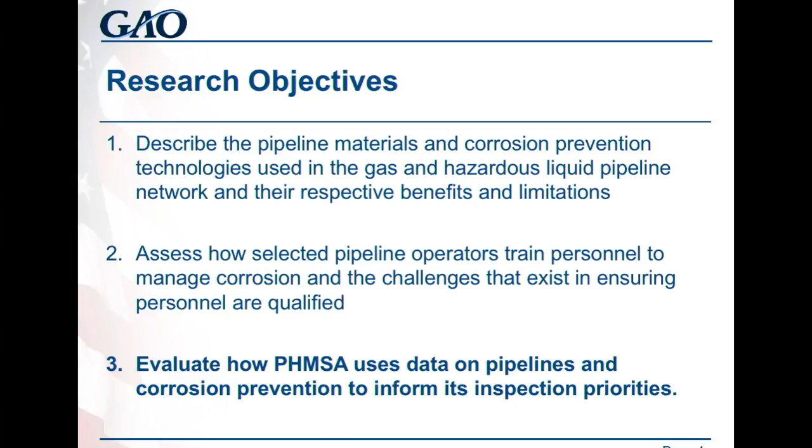Real quickly on the methodology, what we did was we assessed the data that PHMSA has available to itself when it is determining its inspection priorities, and that includes the inspection data that it collects through integrated inspections, as well as the enforcement data, as well as operator reported data through annual reports. And we evaluated how PHMSA uses this data through its risk ranking index model, which we'll explain in more detail in a second.

We conducted a number of interviews with PHMSA personnel, both at headquarters and across the country, who are involved in these inspections. And we compared PHMSA's approach with federal standards for internal control put out by the GAO, as well as OMB guidance on risk analyses, as well as with PHMSA's own strategic plan.

So real high level, this information won't be new to folks in this room, but as you know, we have a wide-ranging pipeline network in the United States that includes gathering, transmission, and distribution pipelines. The focus of our work in this presentation is on the transmission pipelines, and even a small segment of those pipelines, which are the interstate pipelines that we looked at. And those are the pipelines that are directly inspected by PHMSA.

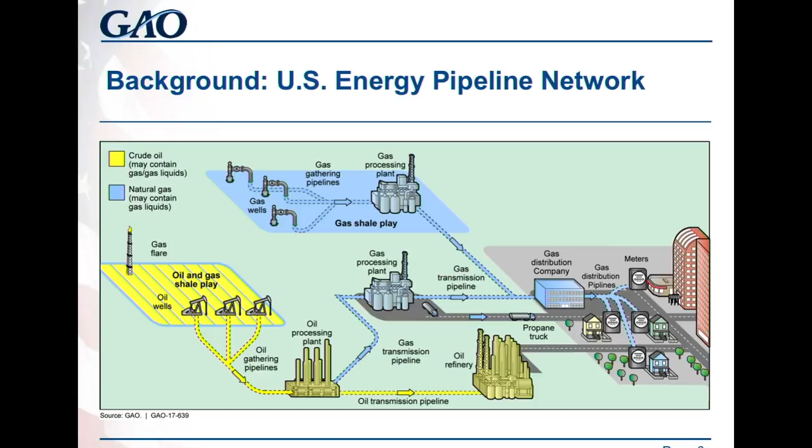Those pipelines are, of course, also under the integrity management programs, and the pipeline operators maintain their own systems and perform their own safety evaluations. But we were looking at PHMSA's approach to doing their own inspections of interstate pipelines.

Just a couple things to note about PHMSA's role in terms of oversight. The states also have a great role in terms of managing and overseeing intrastate pipelines. PHMSA's role is on conducting what they are known as integrated inspections.

And these are primarily desk reviews, but they also include going out and walking the lines with pipeline operators and identifying areas of concern that operators may have identified with regard to how their cathodic protection is operating, or evaluating areas that operators may have reported to PHMSA in terms of challenges with either bare pipe or perhaps ineffective coating.

And PHMSA uses its inspection staff, approximately 200 or so individuals across the United States, to perform these as well as other activities, and Ken can probably talk more about that, about how that staff works.

Real high level, I think the other speakers on this panel will talk about internal corrosion. But between 2010 and 2015, corrosion-related significant incidents accounted for about 22% of all significant incidents that were reported by operators. Within that corrosion, there is, of course, external corrosion events, and there's also internal corrosion events. And the prevalence of those specific types of events can vary across the pipeline network, and I think the operators here can talk about where internal corrosion is most prevalent and what they do to address it.

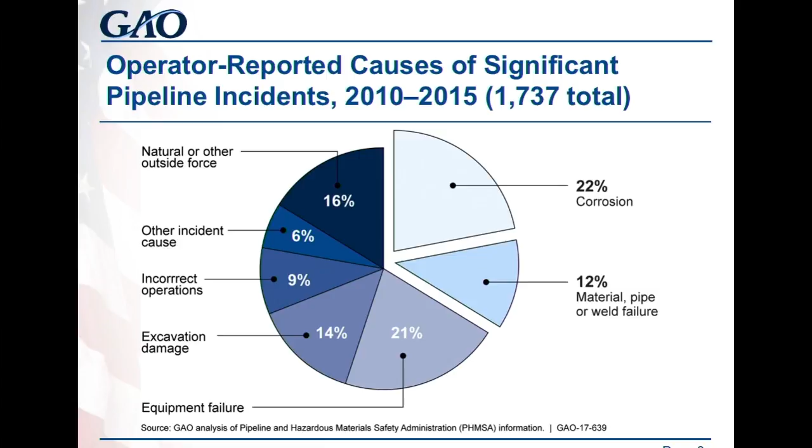So in terms of findings from our report, what we've found generally is that, yes, indeed, PHMSA does make use of data to target and prioritize its integrated inspections of interstate pipelines. However, there are some areas in which it could improve its process, particularly around how it documents the decisions it makes for which pipeline segments to target for its inspections, as well as ensuring that the process it is employing is effective towards identifying those pipelines that are of highest risk and in most need of inspection.

To do this, to prioritize these inspections, it uses what PHMSA calls its risk ranking index model. And what it does, it captures all of the risks within an individual pipeline segment and tries to quantify that risk and then assign either a high, a medium, or low score to that pipeline segment.

And based on that score, pipelines are either inspected by PHMSA on a 3-year basis if they are considered high risk, and a 7-year basis if they're low risk. Medium risk pipelines are to be inspected every 5 years by PHMSA.

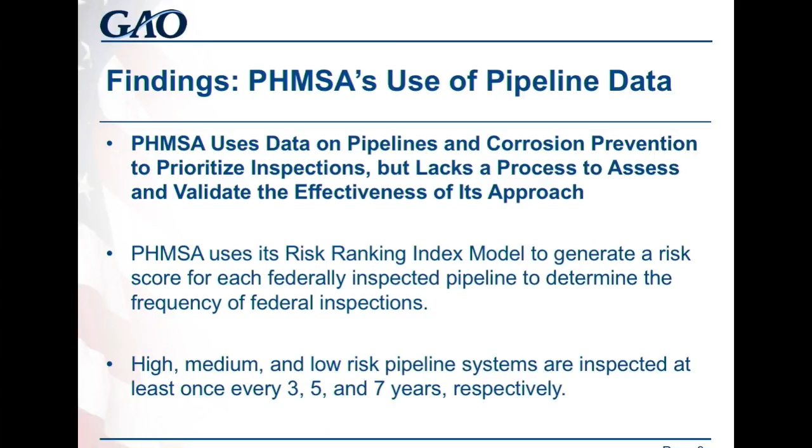And just to give you a sense for how this model works, basically PHMSA looks at the characteristics of an individual pipeline segment and quantifies those characteristics according to various threats that it considers to be indicative of potential incidents. So for example, one of the primary characteristics is unit miles, and that's basically the length of the pipeline segment that they're inspecting. And generally, under the risk ranking index model, the longer the pipeline segment, the greater the relative risk there is, because the longer the pipeline segment, you would have more opportunity for a potential event.

Other threat factors include bare pipe mileage, and whether there is ineffective coating that's been reported by the operators. For example, if an operator identifies that coating has perhaps been disbonded along one of those pipeline segments somewhere, they're having to apply additional cathodic protection, they can report that to PHMSA, and that will go into the model, and PHMSA will use it to evaluate the severity of the potential risk.

Other events include significant incidents, and there are other events that we also include in the report that you can look at. It also included low frequency ERW pipeline miles and other factors as well.

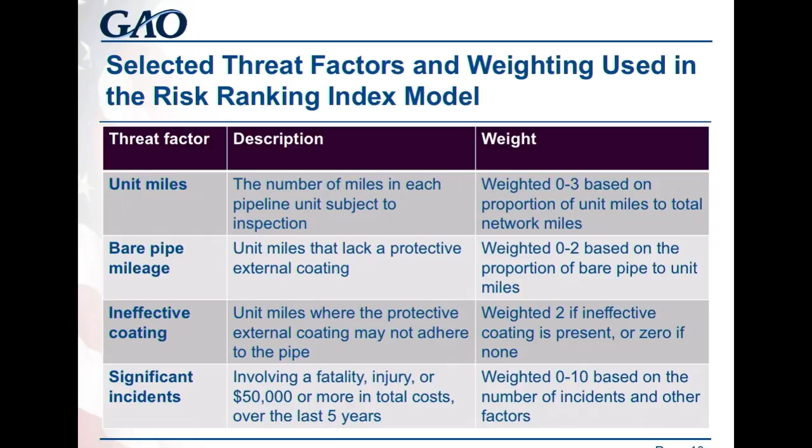It takes all of these threats and PHMSA assigns a weight to each of these threats, adds up the total weight. That weight results in a potential score, and that score is multiplied against a consequence. It basically looks at the pipeline diameter, how much commodity could be sent through the pipe, also the type of commodity, as well as whether it's in a high consequence area, and it results in a score that PHMSA uses to assign either high, medium, or low risk.

So what we found was that while PHMSA is making use of the data that it has available, it doesn't have all the data it would like to make more targeted assessments of risk. We found that PHMSA has not fully documented the rationale behind some of the key assumptions within the model. That becomes a challenge when PHMSA goes back to look at how effective the model is, and whether the assumptions it's made about pipeline risk are still accurate, and whether PHMSA is targeting its inspection forces towards those risks as they currently are.

Among the areas of concern we identified was whether PHMSA had used data to determine the specific weights for individual pipeline threats, as well as the thresholds for risk tiers. Each pipeline segment is given a score, and PHMSA has determined that anything over 30 is considered high risk, anything below 5 is low risk, and anything in between is medium risk. We would expect to see documentation for why 30 is in particular a high-risk threshold and why 5 is a low-risk threshold, and how those judgments were made.

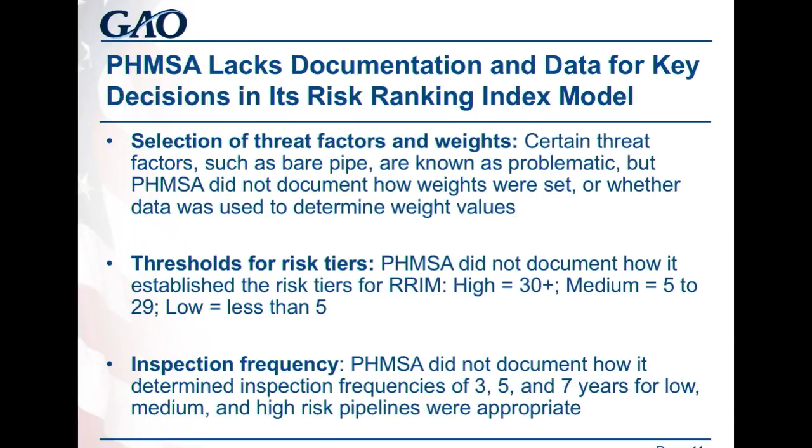The same thing with inspection frequency. Federal internal control standards, as well as OMB standards, require that any judgments put inside a model used for assessing risk by the federal government be clearly stated and based on available data, and that PHMSA use that data to make those assumptions so they can be further evaluated in the future.

So just to explain how the model works: as a result of the threats and weight factors, in 2016's run of the model, basically 70% of all pipeline mileage that PHMSA inspects is considered high risk and is subject to PHMSA integrated inspections every 3 years. 1% of all pipeline miles that PHMSA inspects are considered low risk and are subject to inspection every 7 years.

From our perspective, that balance may be correct—that's up to PHMSA in terms of how it wants to allocate its resources—but we would expect there to be documentation in place for the rationale behind how this model works. Considering that PHMSA has limited resources to conduct those inspections, approximately 200 personnel across the country, making sure it's applying those resources to address the highest risk pipelines is important to ensuring the safety of the system.

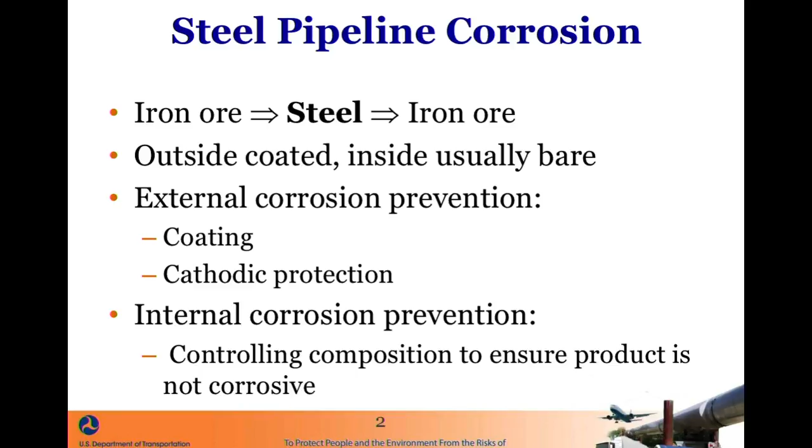The main method to control corrosion on the inside is to control the composition of the natural gas, keeping it dry, or if it's a liquid line, keeping water and other impurities out of that line. So in general, oil and gas is not corrosive to steel - it's just the impurities which are.

Here's a list of some of the impurities. We try to keep out water, carbon dioxide, chlorides like what may be found in salt, and hydrogen sulfide. Some of you may have heard the term sour gas - hydrogen sulfide results from organic decomposition, like the rotten egg smell, and we try to keep that out.

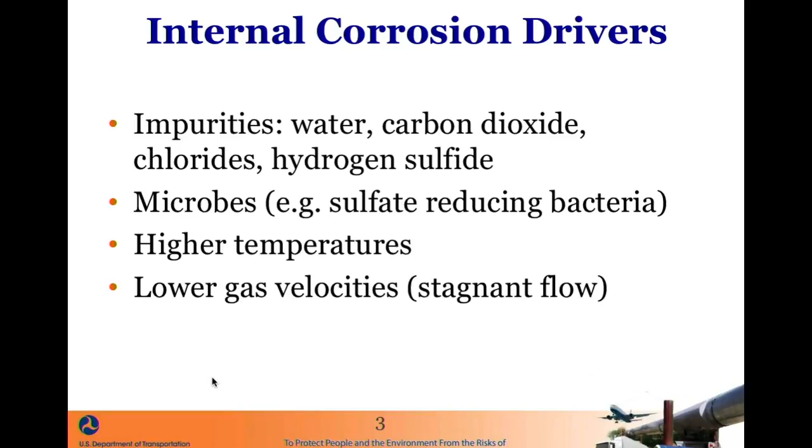Other things that may occur is if water is present inside the pipeline, bacteria or microbes may grow, and essentially they poop acid, which will dissolve the steel. That can occur on liquid lines. There's also a rule of thumb regarding temperature: every increase of 10 degrees Celsius will double the corrosion rate, so that will affect corrosion.

Most pipelines flow at more than 10 miles per hour, and that keeps the product flowing - it will sweep away any water or impurities in there. If you have slow-moving velocity streams, you could get stagnant flow. If the water sits in one spot for a while, it could localize the corrosion in that one area.

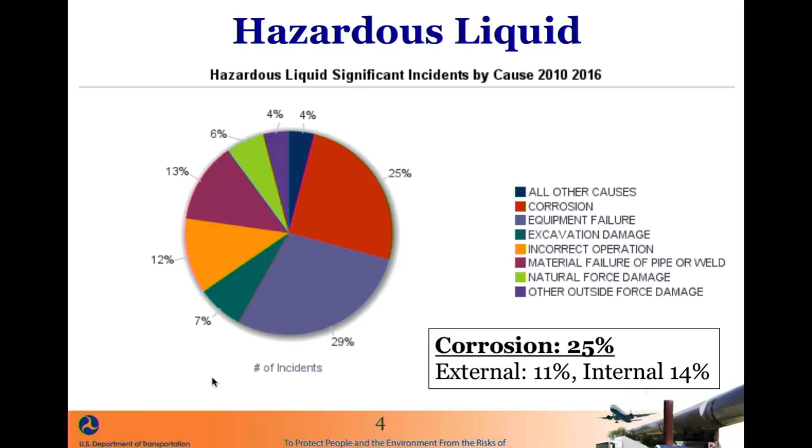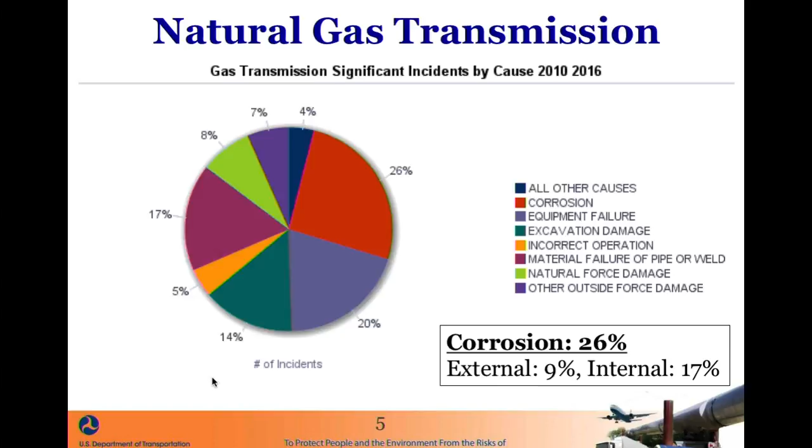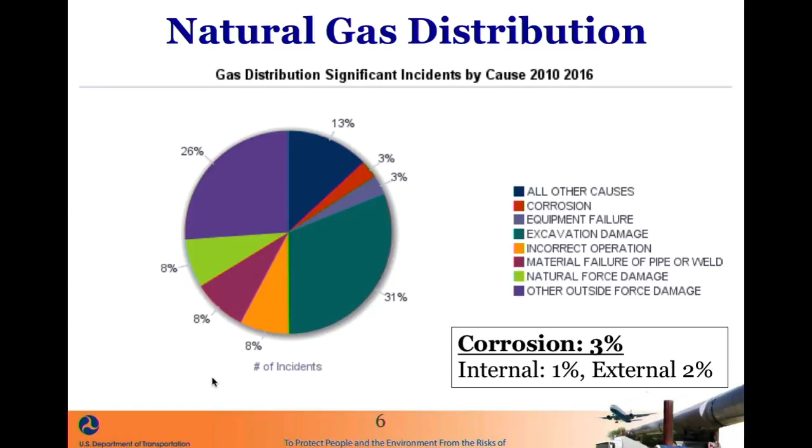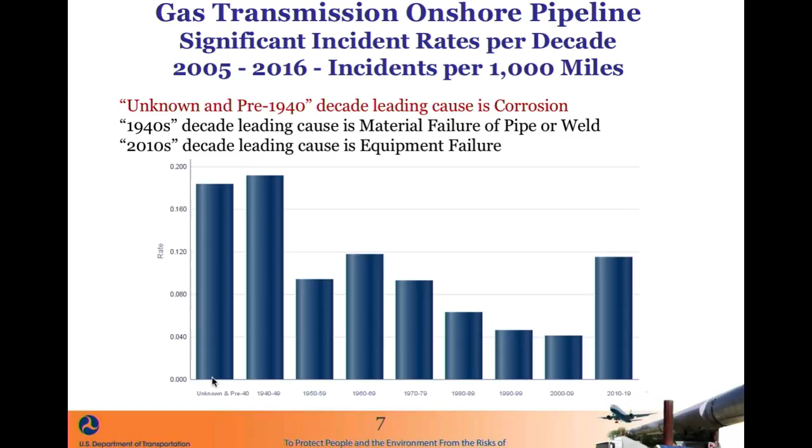So I want to highlight some of the significant internal corrosion incidents. The real game changer in the industry was the 2000 Carlsbad, New Mexico incident, where 12 people died camping next to a gas transmission pipeline in a Class 1 location, essentially in the middle of nowhere. But they were right next to a segment of the line which collected a lot of liquids, and that caused internal corrosion of this line, which was not subject to inline inspection. We passed new regulations since then, which I will focus on, to help prevent an incident like that from occurring again.

And this is a partial list of some of the other incidents here involving liquid lines. As you see, most of the significant incidents are smaller releases.

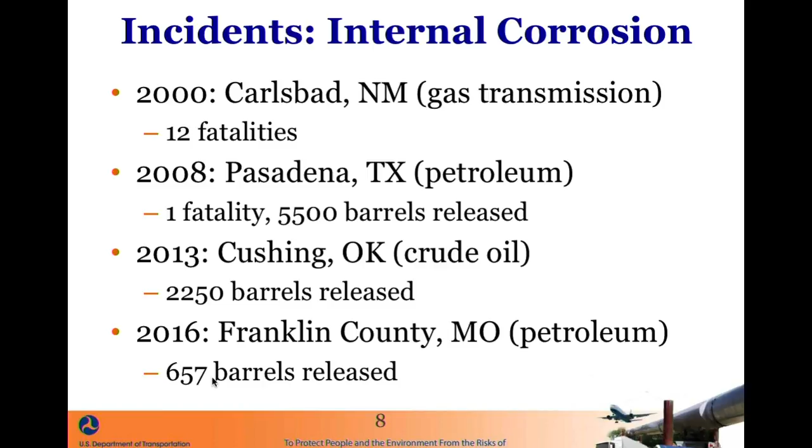So the main way that we control internal corrosion is by making sure that the product inside the pipe is not corrosive, and we do that by controlling the impurities in the pipe. There's a lot of monitoring which takes place, and for natural gas, the FERC tariff requires 7 pounds of water maximum per million cubic feet of natural gas, and a lot of times the customer has specifications for the amount of quality and impurities that are allowed in the product.

Another way is to minimize stagnant flow in a line. If the product's always flowing, corrosion will not localize in one place if the corrosion products are constantly moving. For natural gas lines, it's important to remove the water because without water, natural gas line corrosion really does not occur. There's also frequent monitoring and inspections which take place, and that's a very important part, because if you don't look for it, you won't find what you're not looking for.

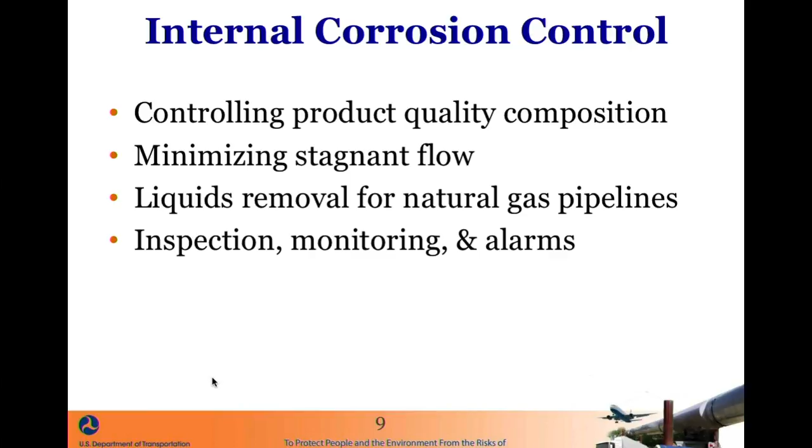So coupons are placed in the pipeline. There's monitoring equipment to test for the amount of water, CO2, H2S, and there can be alarms that go off in the control room if they exceed certain levels.

To remove water, cleaning pigs are often run to push water out of the system. Inhibitors are added to slow down corrosion rates, especially in liquid lines. Biocides are added to stop the microbes from growing - these are like antibiotics to keep the bacteria level down. And there could be other chemical additives as well.

Inline inspection tools are one of the best tools to use to detect internal corrosion. You'll see that throughout the pipeline safety regulations, running ILI tools as a part of effective integrity management to control corrosion rates.

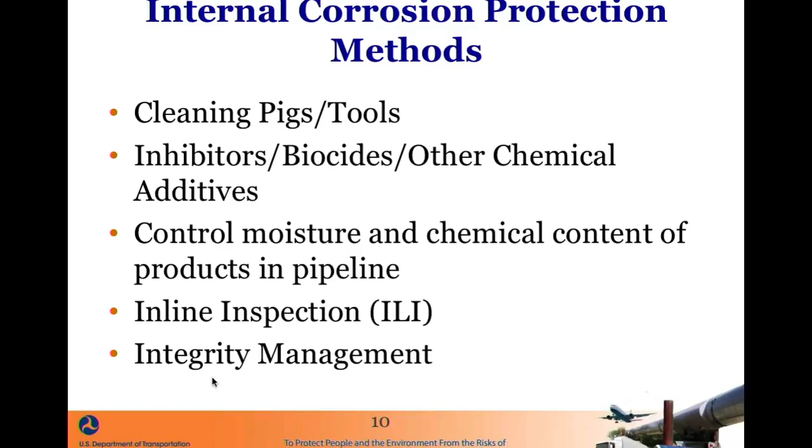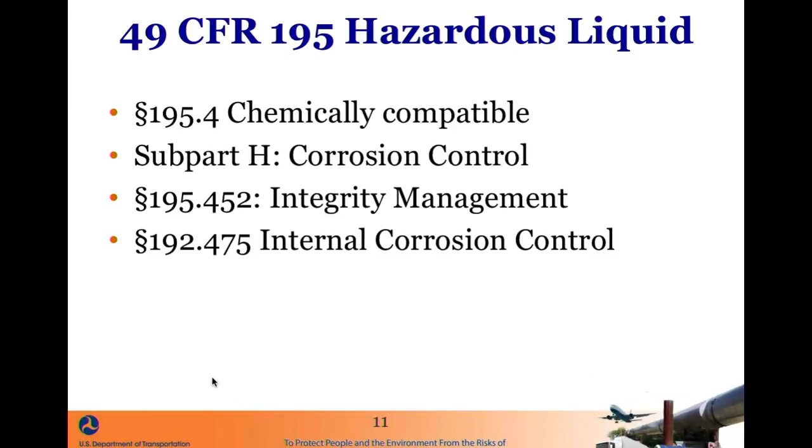So corrosion is mentioned throughout the federal code. These are some of the Part 195 code sections that apply to hazardous liquid pipelines. It says the product inside the pipe must be chemically compatible with the steel pipeline. There's an entire subpart on corrosion control, and integrity management focuses highly on corrosion there. And similarly, in the gas code, in the Part 192 code for natural gas pipelines, there's similar sections in there.

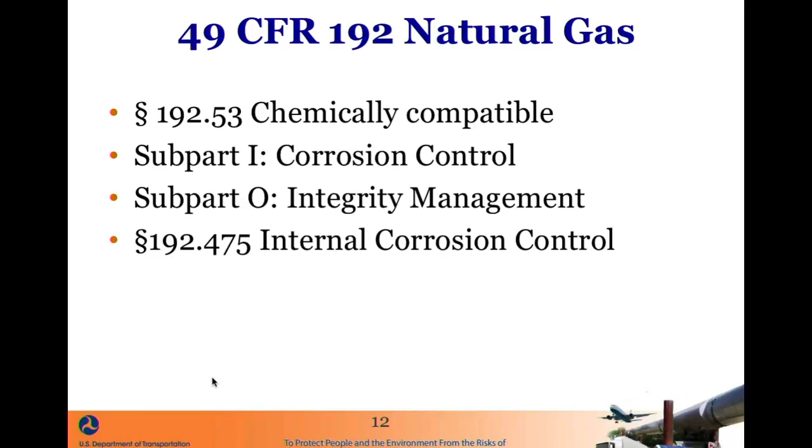I'll talk about 192.475 in the next slide. In the natural gas code, it says corrosive gas may not be transported by pipeline - it's pretty clear, prescriptive on that. And it says whenever a pipe is removed from the system, the internal surface must be inspected for evidence of corrosion. So whenever you're doing pipe replacement, that's something that you need to be looking for.

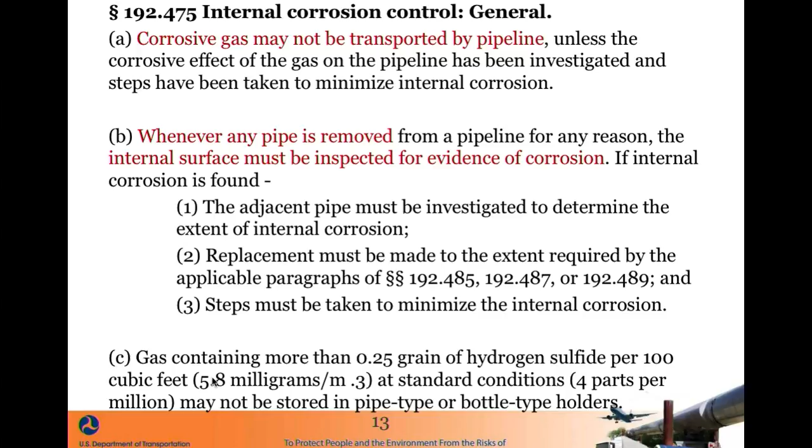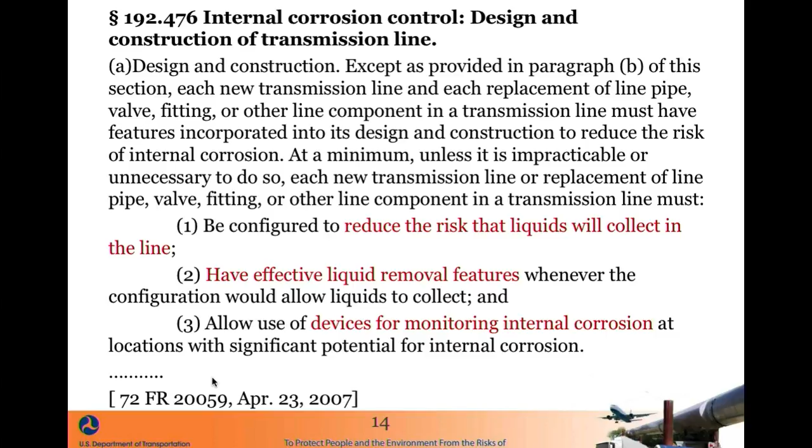So PHMSA, we have many tools. Many of you know about our regulations. We also have about 150 pipeline inspectors, and I think more than 300 partner state inspectors that are out there inspecting pipelines nationwide. We also take enforcement action with corrective action orders, fines, penalties. But one of the nicest, most effective tools I think is the research side. We have a $12 million a year research budget to try to improve pipeline safety. It's more of the carrot approach rather than the stick - we try to shoot for improving best practice, improving the technologies versus the punishment side.

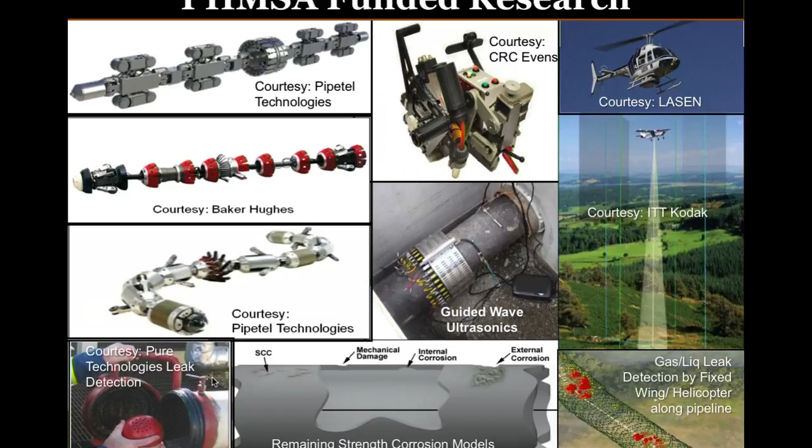Specifically related to internal corrosion, these are some of the projects we have. The first is advancing the technologies used in inline inspection tools to improve the probability of detection and accuracy, to find smaller defects.

The second is that we have models widely used in industry, including RSTRENG, and we have research to improve these models to provide better calculations on how much life you have left in the line, so we could effectively manage it before it fails.

The third one is interesting - it refers to MIC, or bacterial microbe growth, and it uses essentially an antibiotic cocktail. Instead of using one antibiotic, it's a mixture of several to prevent microbes from growing inside of that line.

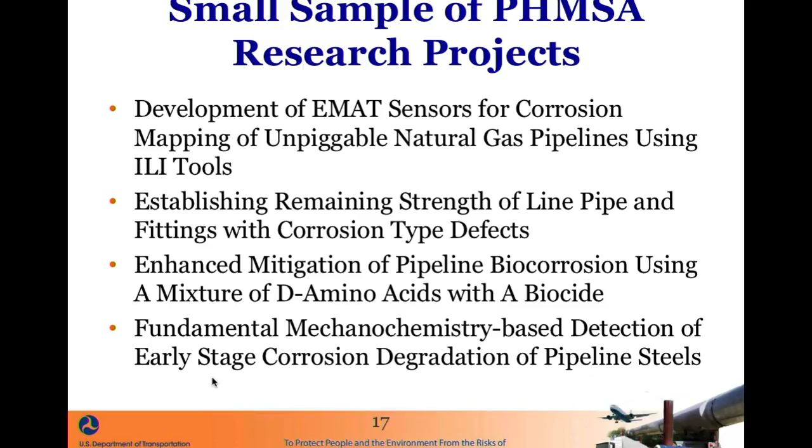The last one is to provide earlier detection of corrosion rates. That gives us a very quick summary. Internal corrosion remains a focus of PHMSA. We're very concerned about it, and we have efforts on all fronts to address this - the regulatory side, inspection and enforcement side, and the side that falls under me, the engineering and research side, where we work with service providers and standards to try to improve it. Thank you.

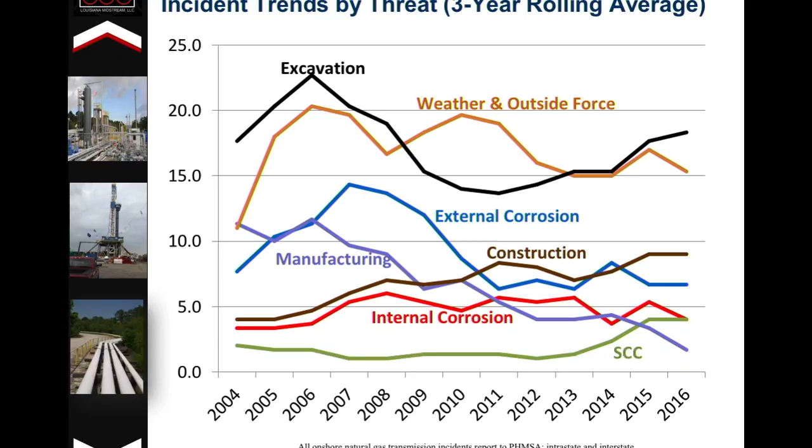I want to talk to you today strictly about internal corrosion. I'm going to skip a couple of these charts and show you an interesting trend in the last few years. You see that internal corrosion is actually lower in terms of number of incidents than external corrosion.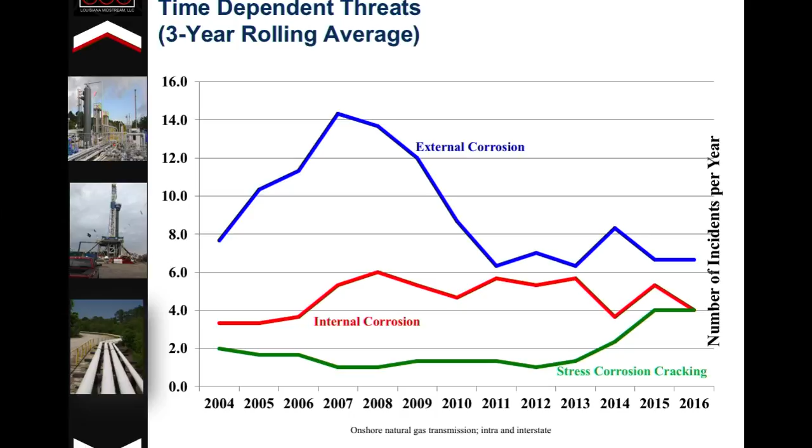Stress corrosion cracking - who's heard of that? Okay, so that's some kind of bad stuff, right? We track all that information, and obviously we send it to PHMSA. This comes from PHMSA. So we're going to talk about internal corrosion specifically, which is not the highest number of related failures reported, but it's a very significant event.

We don't have to cut it to see it - we can x-ray it, kind of like you x-ray your tooth. That's what we normally do when we dig a location and want to see if it has internal corrosion. We x-ray it, because if you use your ultrasonic thickness probe and happen to put it here on the outside, you're not going to see anything, it's not going to measure anything. So it just depends where you put your probe - you might get lucky and see a wall loss, or you might not. So we x-ray it so we know where it's going.

Now, internal corrosion is caused by water in the pipeline. That's it - if you have no water, you have no corrosion. So the question is, well, duh, get the water out. Well, that's what we try to do every day, every hour, every minute. Now, there's a lot of stuff once it's mixed with the water that causes us problems - salts, glycol, bacteria. Yeah, bacteria lives in our pipelines, and they are nasty little critters, and they poop often.

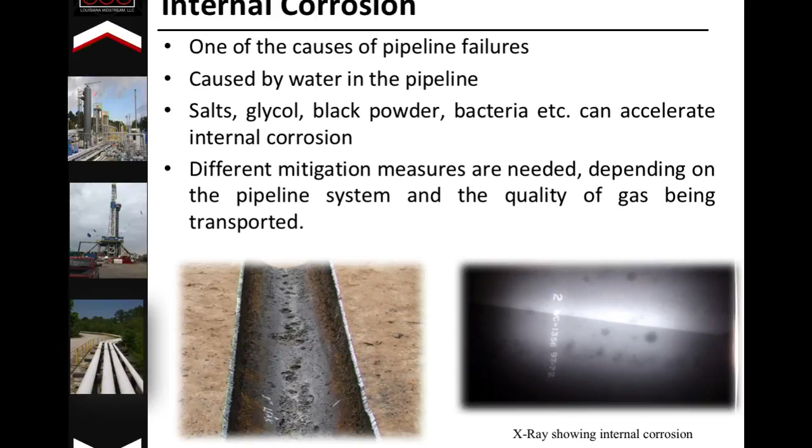So we try to... Now, how do we control it? We have many different ways of controlling internal corrosion. After Carlsbad, I did a lot of work for El Paso during that time, and we really got a lot more engaged and serious about trying to apply every tool in the toolbox to get rid of internal corrosion. So how do we do that?

There are piggable pipelines and non-piggable pipelines in this country. For a piggable pipeline, it's really fairly simple. You clean it, you pig it, you inspect it, you find this stuff, and if it needs to be fixed, you fix it. Sounds pretty logical. But the problem we have is we don't have all of our pipelines piggable, so we have to deal with non-piggable pipelines.

So how do we go about not allowing internal corrosion? The first thing you've got to do is try to make sure that there's no water in the pipe. So you monitor gas quality. We have gas chromatographs everywhere, right? So we try to make sure that no water enters the pipeline. I would rather do that than have the pipeline full of water and then have to deal with it. Does that make sense? So we try to get the water out, we monitor and we sample.

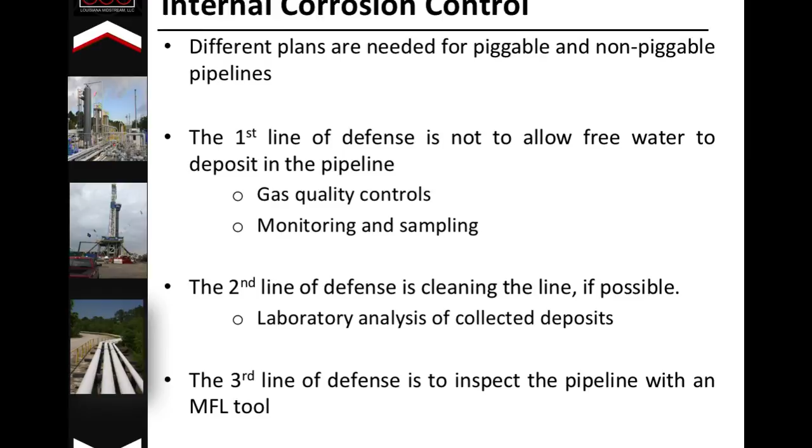Who's heard of coupons? And these are not the stuff you redeem at Walmart. Okay, we'll show you a picture of those.

The second line of defense is clean the line. Now, in our company, every time we clean a pipeline, we sample what comes out. That's automatic. We take a sample of the water or the fluid, we send it to a lab, the lab runs the analysis and tells us what's in that cocktail mixture. So that information is very important because that tells me if I need to increase the frequency of my cleaning or not. So if I run a pig and I get nothing, why do I need to run it next month?

I can probably delay it a few months. Now, if I run a tool, or if I run a cleaning pig and I see a lot of bacteria, then I have to do something else. So sampling, monitoring, and detection is a very critical part of internal corrosion defense.

And then our best tool really is an MFL tool, magnetic flux leakage, our smart pig. There's a reason why they call it a smart pig, because there are dumb pigs too. I'm going to show you a picture of those.

Okay, so gas quality, we just have to enforce our tariffs. We know we're not supposed to have more than 7 pounds of water, so we just have to enforce it. If somebody gives you more than 7 pounds of water, then you have to either shut them in or make a quick phone call and say, hey, what's up, what's happening? Carbon dioxide is a very critical part, and we have a tariff for that.

Hydrogen sulfide, we have a tariff for that too. So we do not want to allow more than 7 pounds of water. We have online analyzers, and we do have automatic shut-in valves.

Now, a producer can get really ugly if your shut-in valve is 30 minutes. So they want it to be 30 years. So we start our negotiation between 30 minutes and 30 years, and we end up probably at about an hour. So we have to give the producer time to make sure his glycol tank is full, to make sure his treatment system is working, but we need to be prepared to shut him in so we don't allow a lot of water in the pipe.

Now, how do we monitor? Coupons, weight loss coupons. These are the guys at the bottom left. Basically, it's a piece of steel of a very, very specific weight. We measure it down to the thousandths of a gram, and it has a code on it, a number. We insert it into the pipeline at a very specific location. We have to know where that is. And then we come back every 6 months, we pull it out, and we measure and weigh it again. If it loses weight, this means there's corrosion, and we can calculate that with a simple calculation. And if it doesn't lose weight, then there is no internal corrosion happening during that 6 month period.

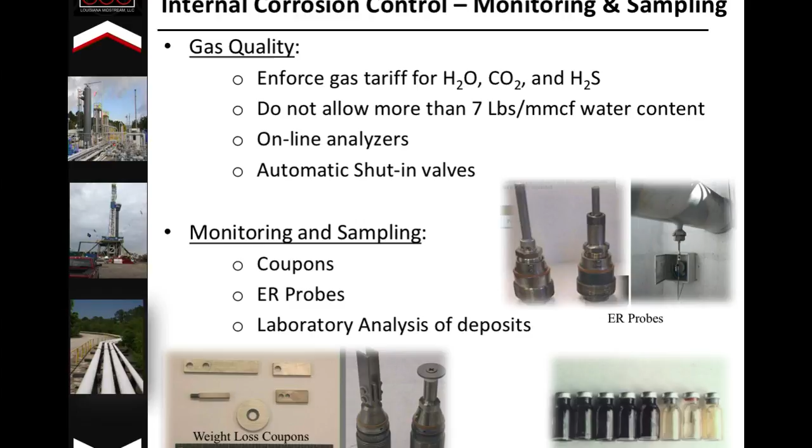So we collect the deposits. We adjust the cleaning frequency based on the results. We do chemically treat certain pipelines. I'll show you a picture of an injection pump. And biocide to kill bacteria. Now, the biocides, we have many different kinds. My favorite is formaldehyde. It works when I'm dead, and it works in the pipeline. That is my favorite biocide.

Inline inspection, obviously. And inline inspection is really interesting because when you run that tool and you get that data, if you see a very specific area of a high concentration of internal corrosion, then you have to start asking yourself a question. And a lot of times, it is just downstream from a producer. Ding, ding. So that information is very, very important.

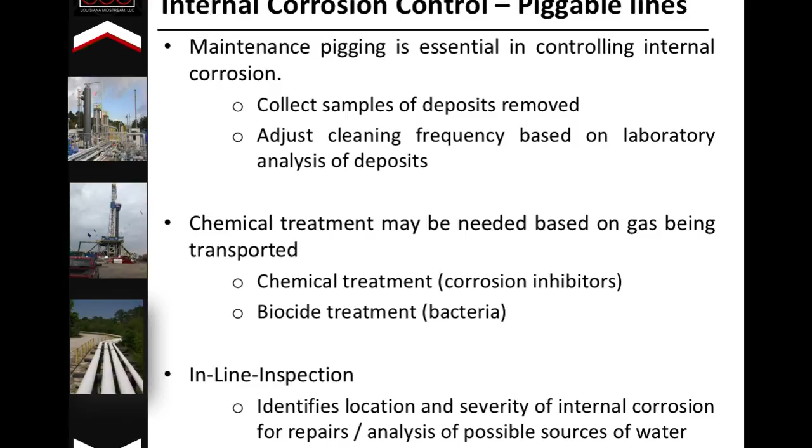There's brushes, there's cups, there's all kinds of different ones, more aggressive, less aggressive. We clean our lines based on specific criteria, the line has to be piggable. You cannot clean an unpiggable pipeline. So the pipeline has to be piggable in order for you to launch these cleaning tools.

We have pipelines that we've ran 500, 600, 700 cleaning pigs. If it's a pipeline that's never been pigged before and we just made it piggable, it will take that much. So that's how we clean our pipelines.

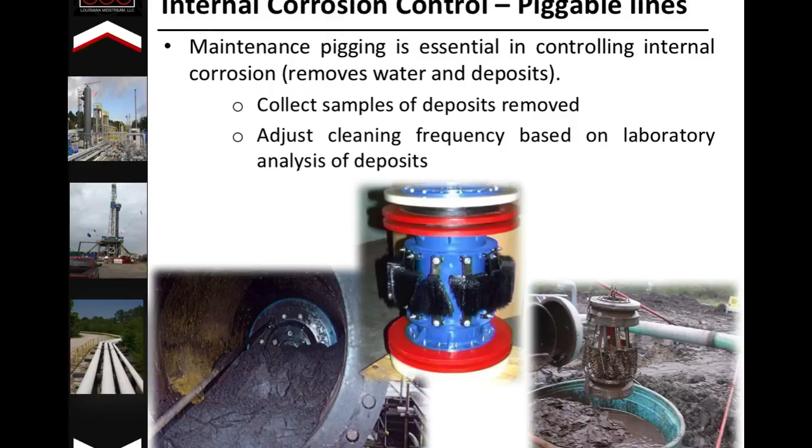Then we go downstream and we take monitoring samples. So we see if the chemical is still effective, how far down the line it's going. So there's a little bit more science behind it. It's not just, you know, drop a bomb and walk away.

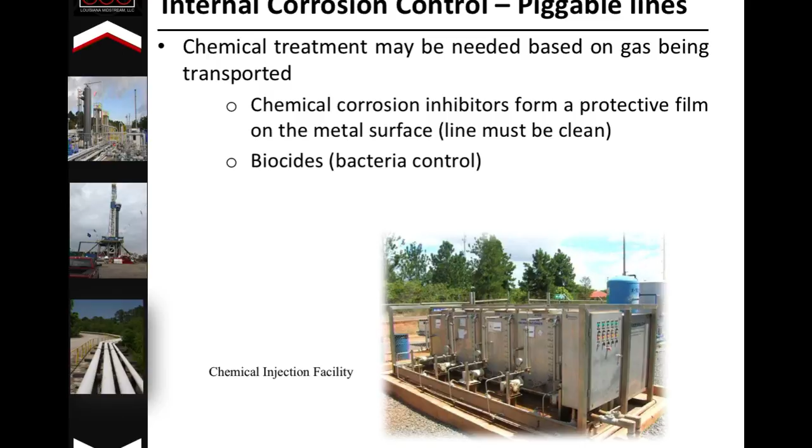And the 40 megabyte hard drive was about this big. Now I have a terabyte in a chip like this, right? So now I can run 120 miles in a tool run and not have to worry about running out of memory or running out of battery.

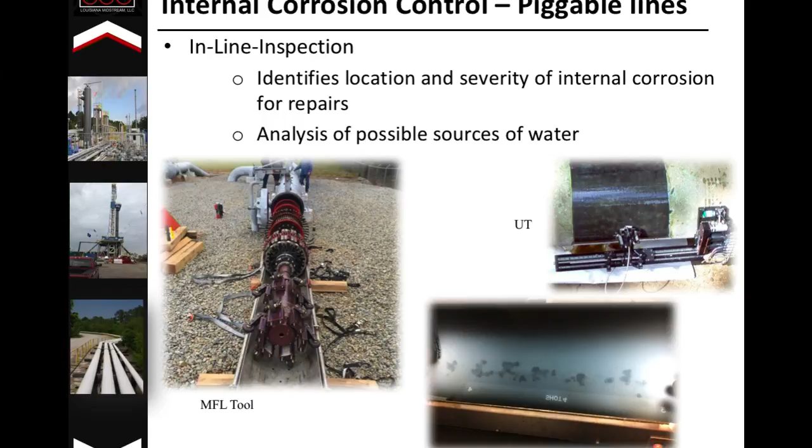And the sensors are different. If you look at here, you see a lot of magnets. A lot of these tools also are dual tools. They are also a caliper tool at the same time to find dents. At the same time, it's an MFL tool. So we run those a lot too. And there are different tools, but this type of tool works very well on corrosion.

Years and years and years in service. This pipeline is vintage 40s, never been cleaned. In the 40s, they didn't think of this stuff. They didn't think of running pigs and cleaning. It was just a matter of building it and moving gas.

So this is an area where we look in our plans and we see where the sags are. Pipelines are not straight, so we look at the worst sag, we dig it up, we cut it, and that's what we find. So how do I control internal corrosion in this type of situation?

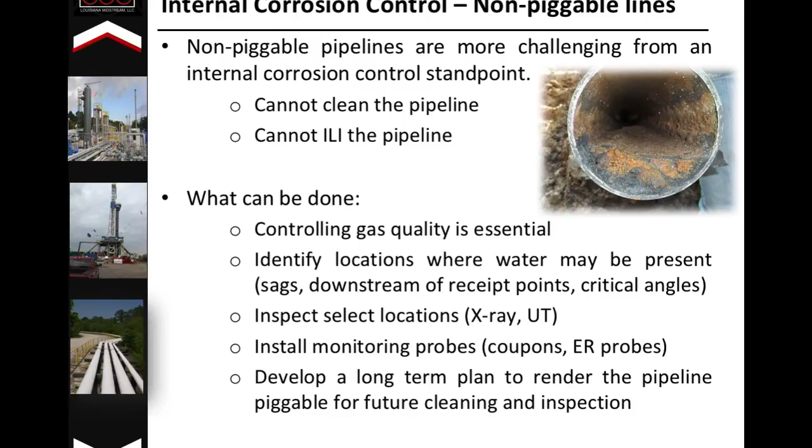Well, I can't pig it, so the only thing I can do is prevent water from getting in there. So I monitor. I select certain locations. I X-ray. I install a lot of coupons. And I develop a plan to somehow get these lines made piggable and cleaned.

We do the same with all of our storage fields. Storage fields are very difficult fields to pig. So we have a site-specific plan for each storage field because everyone is different. So basically, it's monitor, analyze, inspect.

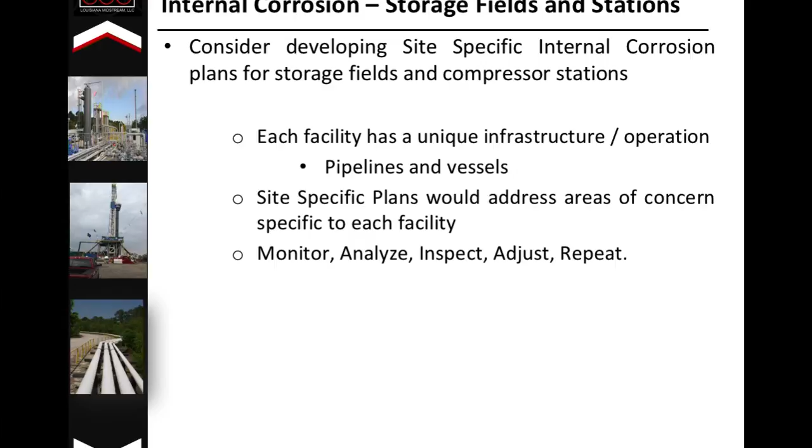So finally, that's my last point. We do a very good job with piggable lines, an excellent job. That's why our internal corrosion failure rate goes down. We just have to find a way to deal with non-piggable pipelines, and there are thousands and thousands of miles of that stuff.

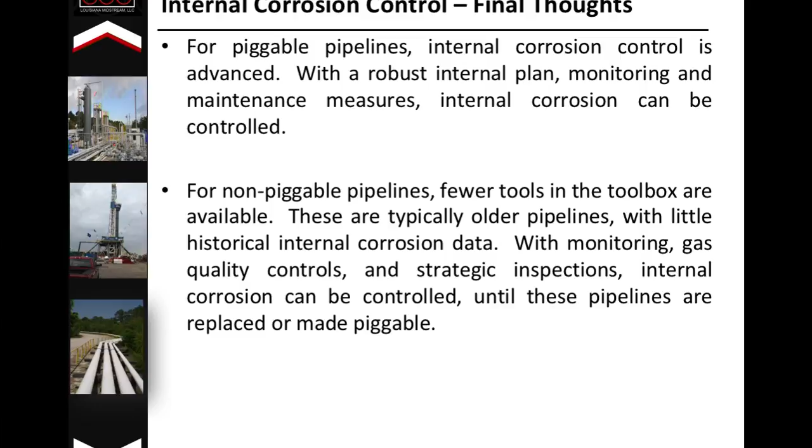Well, questions at the end, right? Thank you.

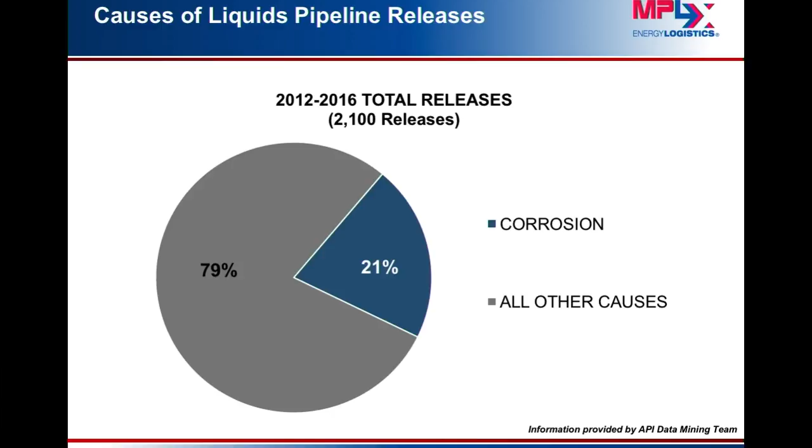I want to dive in a little bit further into the pie slice that relates to corrosion. Okay, so when we look at this, we can divide it between facilities and mainline.

And you see about a 50-50 split between facilities and mainline. By facilities, I'm generally referring to a location that is within an operator's fence line. When you look deeper into the facilities, you see that internal corrosion is the larger cause, about 80%, while external is about 20%. And Tony did a good job explaining some of the risks there.

In the facilities on the liquid side, this is where you see some of your unpiggable pipe, some of the more difficult to inspect pipelines. Now on the main line, which refers to the pipe that's outside of the facilities, the pipe that might go across country on the right-of-way, what you see is that external corrosion is about 1.5 times as frequent as internal corrosion.

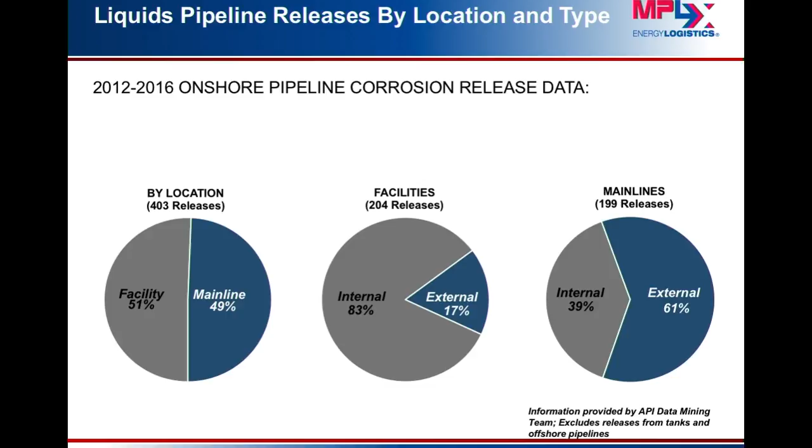So no presentation would be complete without some good pictures here. Corrosion is a naturally occurring force, as Ken explained, so the pictures can be pretty interesting. And what I learned today is you're supposed to say poop in your presentation when you talk about internal corrosion.

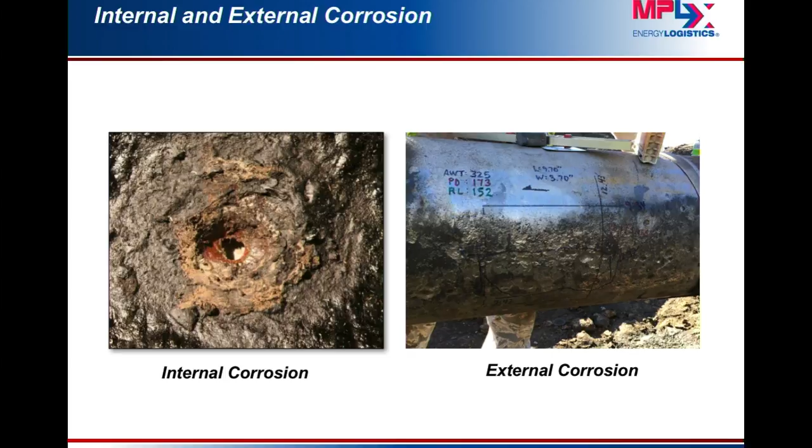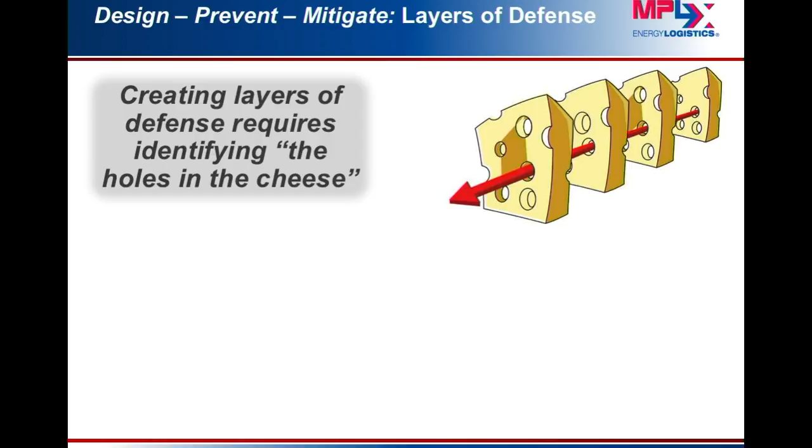So I want to step through some of the layers of defense. Some of these have been touched upon already, but we'll go through them again anyway in case some folks are seeing it for the first time and kind of want a second round.

First layer of defense - and I don't know how clear the screen is in the back, so I'll talk through this - first layer of defense is the pipe. It's steel, incredibly strong, and it's what we build our pipelines out of. But it's got an Achilles heel: pipe will corrode if it's not protected when it's set in the environment.

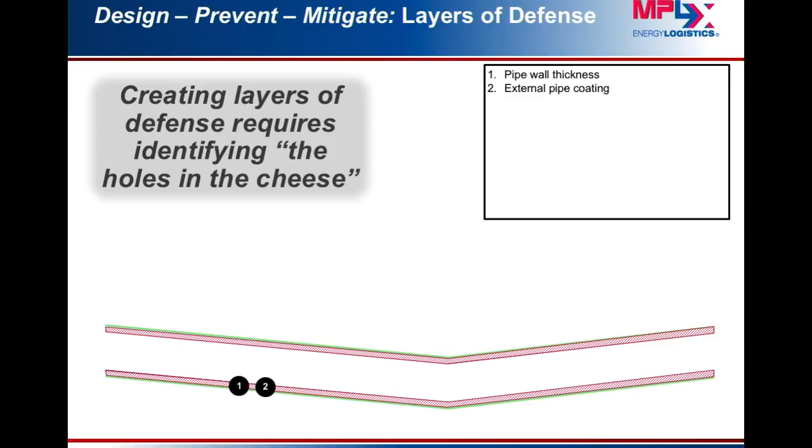Okay, so the first line of defense against external corrosion is going to be your external pipe coating. And in some applications, people are internally lining pipe as well, so that if you have water contacting it at a low point, you're protected.

Next line of defense is cathodic protection. Remember the Achilles heel we talked about with the steel? Well, thankfully, as far back as 1824, some really smart scientists learned that if you apply a little bit of current to the pipe, it prevents it from corroding. And these practices are still in place today.

Third line of defense is test stations. If you've ever been on a pipeline right of way, you've seen a post with a cap - sometimes it's a red cap, sometimes it's a yellow cap - that's a test station. It's a location where you can inspect and monitor the health of your cathodic protection system, and that can point to your effectiveness on that layer of control.

Tony taught us about smart pigs and dumb pigs. Next line of defense is a dumb pig, a cleaning pig. It's a great tool to push water or solids out of your pipeline.

And we also learned about inline inspection, or ILI. I'm going to spend a little bit more time in the second half of this presentation talking about inline inspection. It's really a great layer of defense technology because it helps us connect a lot of different dots on our system. It provides great information that we can use to design additional layers of defense.

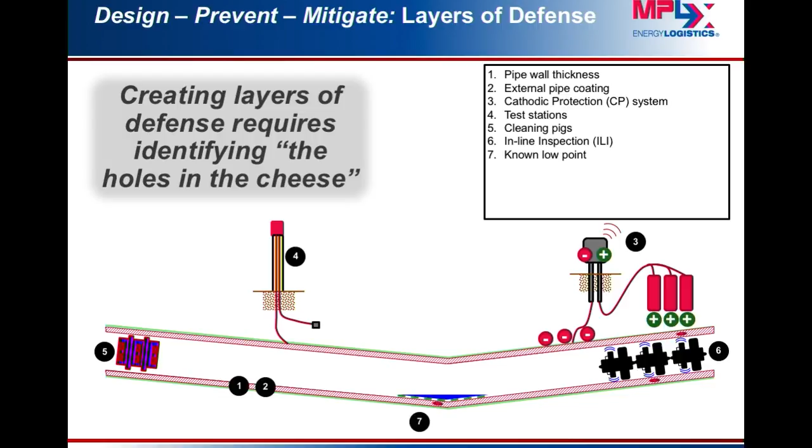For example, on the main line with your combination tools, you may be able to identify where a low point is located, and that's where water or solids could collect. That may be a place you want to look closer at in your program. Now, of course, on an unpiggable line, such as a facility, understanding where your low point is at is also important - that way you can go ahead and design inspection programs for that location.

Now, you might choose to sample your low point to understand what's going on internally in the environment inside the pipe - analyze your water or your microbial activity, for example.

Another layer of control that you might implement following an inspection is to look at your inhibitor or biocide program. You might learn that you have some additional internal corrosion pits on your pipeline, and you want to adjust your program, or maybe something's changed in the internal properties of what you're shipping, and you need to implement a program.

Another piece of technology that we see is corrosion rate monitoring.

Your tools and your inspections can help identify where you may have a corrosion pit. It could be internal or external, but it's important to understand how that might change so you can determine when your next inspection is. You're looking for growth or change. And finally, you might learn something brand new about your pipeline that you weren't aware of, a new threat. Looking at the entire system can help you see where you might need to look a little closer.

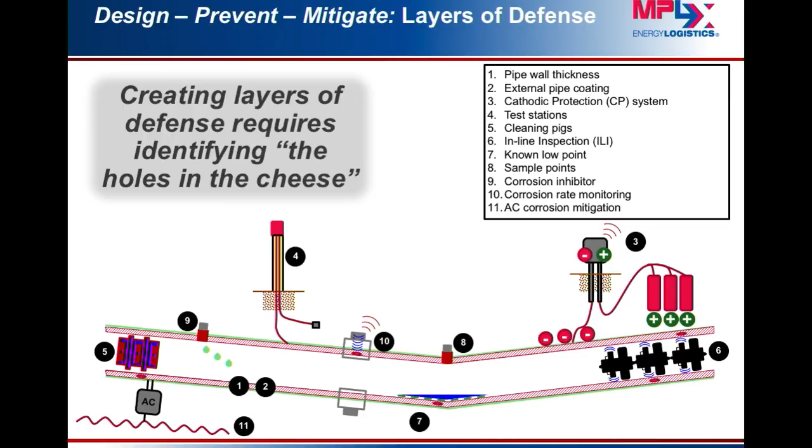I know I've thrown a lot at you. The takeaway here is that each system is unique, and your layers of defense for internal or external corrosion protection need to be tailored to that specific system.

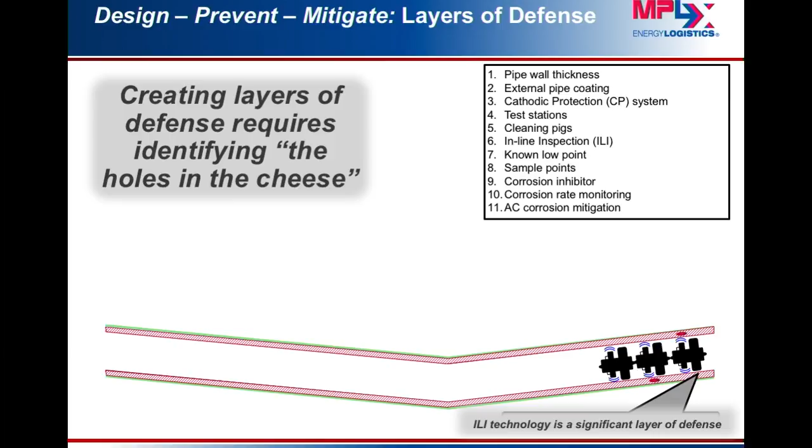Shifting gears, ILI technology is a significant layer of defense. On the next few slides, I'll use the same flow chart at the top to walk through a plan, do, check, adjust model that Marathon Pipeline uses for our inline inspection program. It may look similar to other continuous improvement models you've seen, but for this one there are three main phases.

I want to look at what I found, what was called versus what was found. How did my tool work, and how can I adjust and continuously improve? The inline inspection process is a strong partnership between operators and the technology providers. I think in the afternoon we're going to hear a little bit more upstairs on smart tools.

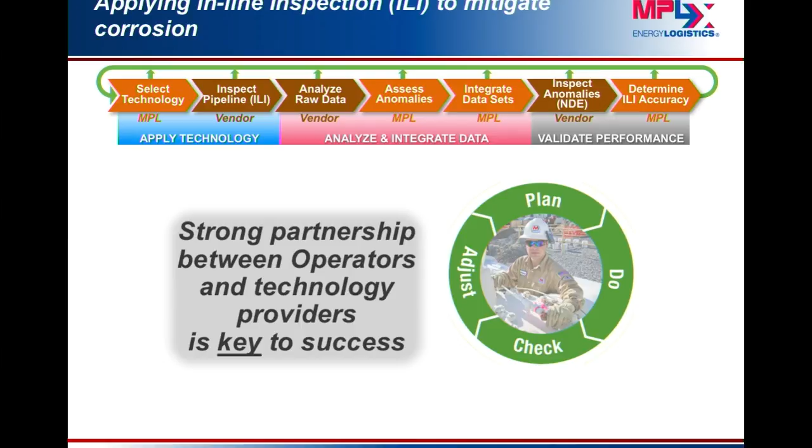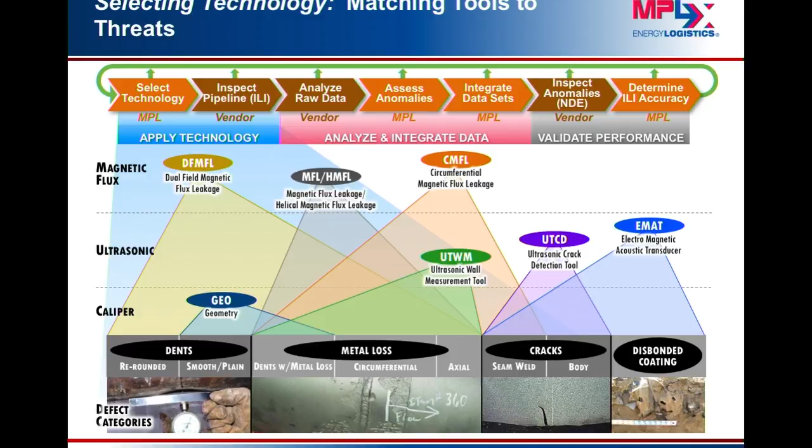When we're looking at corrosion or wall loss, we're really using ultrasonic or magnetic technology, listed on the slide as UTWM or MFL. Another medical analogy: think of an MRI or an ultrasound used to examine a patient. The magnetic flux leakage technology creates an image of the pipe wall, and the ultrasonic technology also creates an image of the pipe wall. All that information collected by the smart tool is stored and ultimately processed into meaningful information.

Some tools are now identifying a metal loss anomaly of 0.2 inches by 0.2 inches - a really, really tiny square. To put it in perspective, there are about 25 of those on my watch face, or about 63 million of those in one mile of 12-inch pipe. That's a lot of data to process.

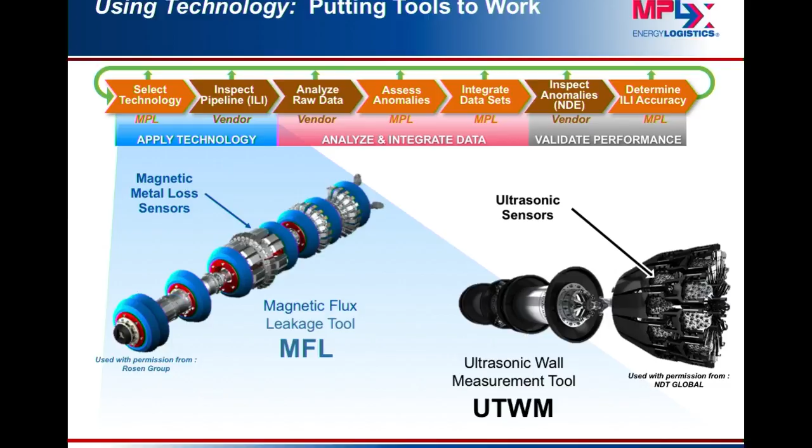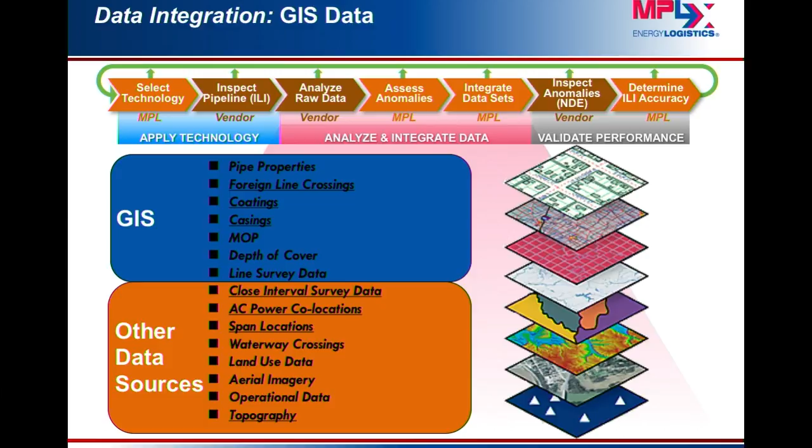The final phase is validating performance, and what this really means is inspection: excavating the pipeline, finding out what features are present on the surface of the pipe, and comparing what you found versus what the tool called.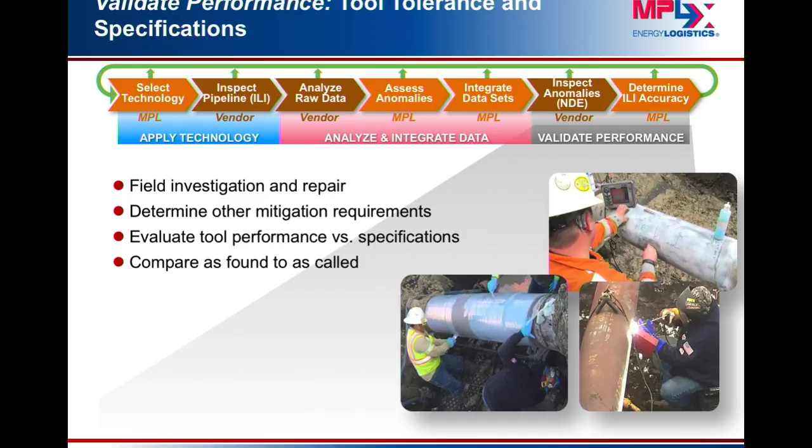This is a pretty key feedback phase because it can tell you how the tool may have performed elsewhere on your pipeline, and it gives you an opportunity to give information back to the ILI vendors who build the tools so they can continuously improve or adjust their technology.

I also want to point out a few groups. I'd be remiss if I didn't mention the efforts of some R&D groups. PRCI is the Pipeline Research Council. This group organizes millions of dollars of the industry's research dollars on tracks such as corrosion, integrity and inspection, design and construction, and many other areas.

That's in partnership with organizations like API and NACE, the National Association of Corrosion Engineers. We heard Dave Murk upstairs in the earlier session talk about all the detailed standards work that the API community does in partnership with operators, regulators, vendors, and suppliers to create industry consensus documents.

So in closing, looking at this especially through the lens of API 1173, which is the safety management system for continuous improvement—plan, do, check, act—I think it lays a really good foundation to continue managing both internal and external corrosion threats. Thank you.